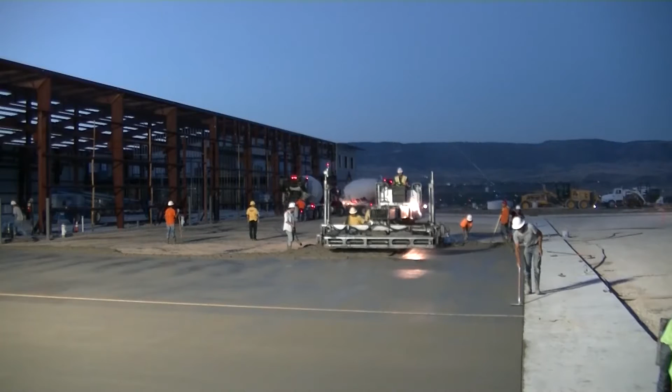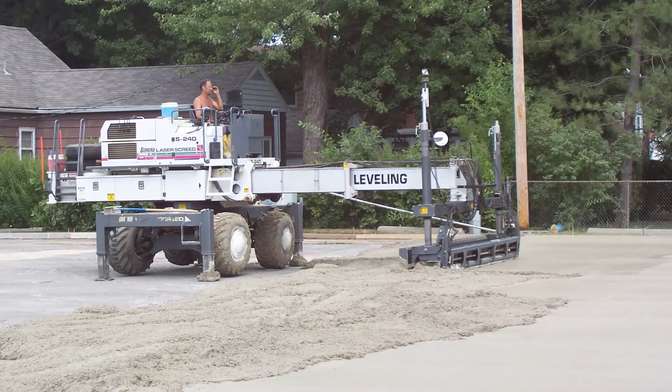Through the course of this video, we're going to walk you through the process of doing concrete overlays on top of asphalt parking lots. Now, this may be a concept that's foreign to some of you, thinking that you can pave directly on top of other pavements. But think about creating a composite pavement or resurfacing the existing asphalt with a longer lasting, durable concrete layer on top. Or if you want to add additional concrete to up the load carrying capacity of the existing asphalt parking lot to change its use.

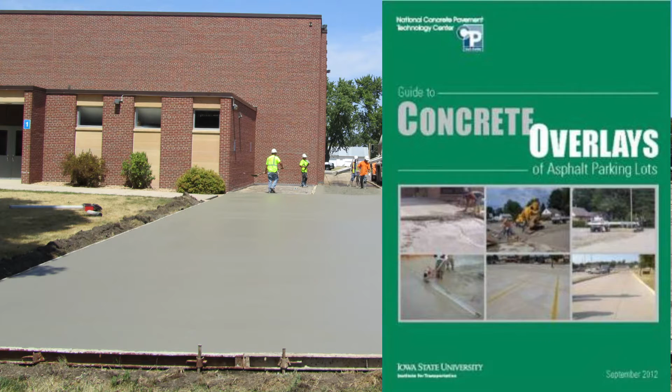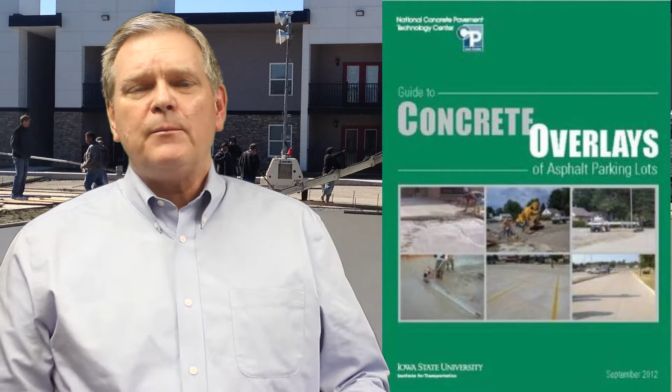We're going to be referencing today a guide that was prepared specifically for doing overlays of existing asphalt parking lots. And before 2012, a document like this did not exist. We've been doing concrete overlays of parking lots for over 40 years. So this is not a new technology, but the ability to take the technology and make it available to the masses across the United States has just come into being by compiling all the information into a concrete overlay guide.

That concrete overlay guide was prepared by the National Concrete Pavement Technology Center, who is the expert in doing all types of concrete paving across the nation. And it's a guide that's been put together to be geographically insensitive. What do I mean by that? It can be used anywhere in the United States with any type of existing asphalt pavement in place, taking into consideration what the mean average daily temperature is for those areas, and that determines what the concrete thickness will be for any given application.

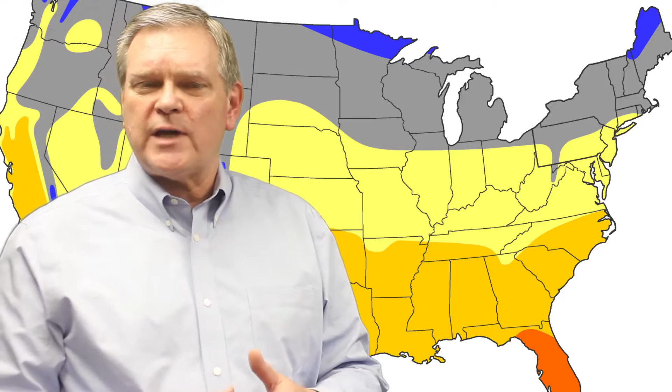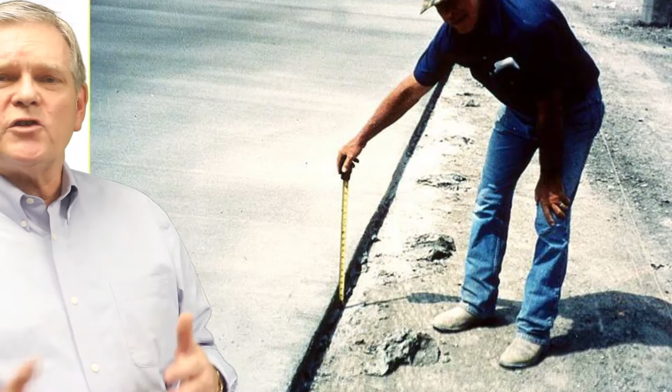This is a widely accepted practice, not only endorsed by the Ready Mix Association, but also by the Concrete Paving Association for doing composite pavements. And when we talk about composite pavements, we think about the terminology of doing layers and layers, building strength into a new pavement. And that's why a thin layer of concrete, something as thin as 2 inches, on an existing asphalt pavement works very well for long-term durability.

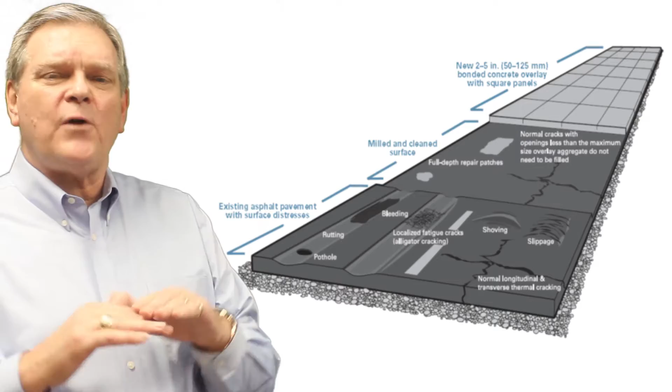Think about taking a piece of plywood, and this plywood gets its strength from different layers being bonded together. And that's really the concept we have when we place concrete on top of asphalt and we bond it to the old asphalt pavement.

The guide was put together in conjunction with the National Ready Mix Concrete Research and Education Foundation, who brought it to the industry at no charge. What do you mean by no charge? Well, it's free for a download that anybody can grab as a free PDF. You can buy printed copies for a very small fee, but it was not the intent of putting this document together to sell it at a profit.

We wanted, more importantly, to get the information out to the design community on how to properly design, evaluate, and determine the thickness for the overlay. It was also designed for the contractor, who can use the document to look at the best practices and the proven practices that have been developed over 40 years of research and proven applications to make these applications successful.

In the course of 40 years, you learn a lot of things that will work, but you also learn a lot of things that don't work. And so the intent of this is to make sure every contractor has a proven guide to work from when constructing these overlays. Let's delve into why we wrote the overlay guide and why it's become the document for doing these types of projects.

Prior to 2012, when the guide was published, we didn't have any definitive document that would teach a contractor or a designer how to design and build an overlay project. We had a lot of other documents that referenced overlays on parking lots that really weren't, though, the guide for how to construct them.

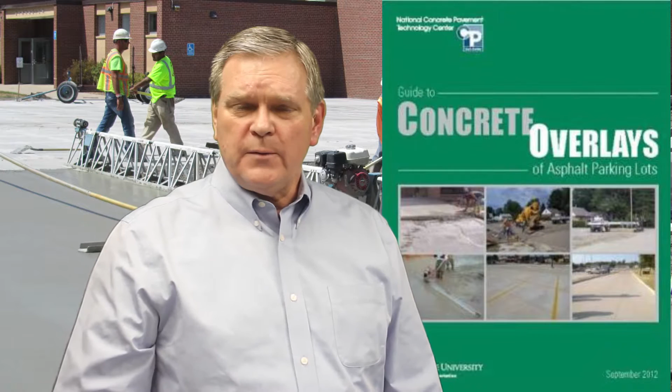So we put together a team of experts, much like the concept of an ACI document, and we brought together industry experts from the engineering community and from the construction community, and we put together the document with a committee of those people contributing the best practices and proven practices that have been done for over 40 years.

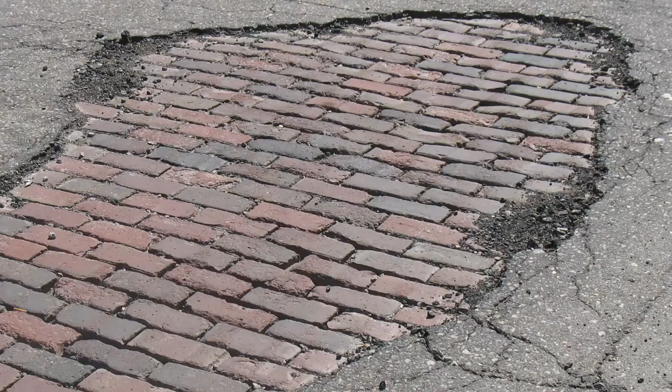Some of the tough things that were hard to do in the beginning was to determine what type of shape the existing asphalt pavement was in. We know that the asphalt pavement has a really good base under it, because one of the things an asphalt contractor does is prepare a very good base for paving the top course on. If we take a look at the existing asphalt pavement, we're able to determine what type of shape that existing asphalt surface layer is in, and also if there's any problems down below in the base layer, it'll show up in the way of potholes and sinkholes and maybe places where the pavement has either heaved or shoved.

By evaluating the existing asphalt pavement, we can then determine what the best approach is. The guide shows us how to do an observation of the existing pavement. It walks us through investigative procedures on determining what the thickness of the old asphalt pavement would be, and then with charts that are developed through the BCOA, which is the Bonded Concrete Overlay of Asphalt Pavements put out by the American Concrete Paving Association, we are able to look geographically at that mean average daily temperature and determine what the thickness will be of the new concrete overlay.

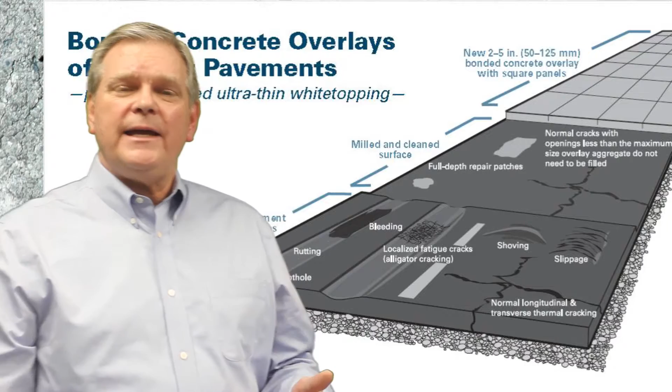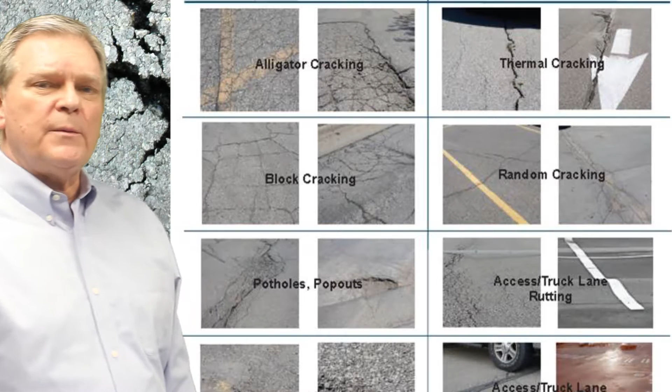And that is the beginning of our process of the investigation of the existing project. Once we determine what the condition is of the existing asphalt, we're able to determine what the best approach will be for doing a concrete overlay on top of the existing asphalt. By using the guides in the book, we give visual pictures on evaluating the condition of the asphalt and determining which type of distress we may have in the pavement, and we're able then to move forward by determining the thickness of the concrete that will be on top of it.

We've then broken the parking lot down into three distinct areas: the heavy-duty loads, the light-duty loads, and the industrial loads. And you can see that we have now determined that maybe those thicknesses need to be different in those different areas of the parking lot based on the existing condition that the asphalt contractor left with base material when he constructed it initially. Then we determine what the joint spacing will be, and we lay out the joint spacing based on a conservative joint spacing arrangement, and we're ready to pave.

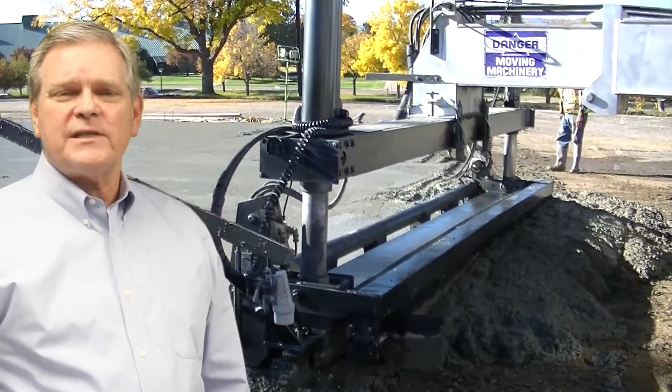From a construction standpoint, what has really moved this technology forward is the advent of the 3D guided laser screed that's come into play over the last 15 to 20 years. Prior to this, overlays of parking lots were done with string lines, hub stakes, pipe screeds and truss screeds, and it was a very long process. What has really changed the process is the 3D laser screed and the total station applications that allow it to read the existing contours of a parking lot and correct any low spots or bird baths that may occur in the existing pavement with the placement of the 3D laser screed.

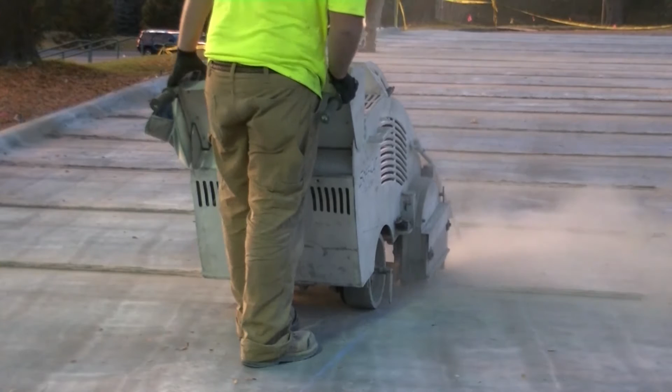It has not only changed that aspect of it, but the production side has moved from just a couple thousand square feet per day to tens of thousands of square feet per day with the 3D laser screed. The advent of the soft cut saw has also helped, because now we can get on the pavements quicker and saw cut them faster, and more importantly at the right time and the right depth of cut with the soft cut saw.

You're going to hear us talk a lot about saw cutting, timeliness of saw cutting and the size of panels, and that's very important when we look at overlays. Leonard will talk more about the importance of saw cutting and its timeliness, but we can't stress enough how important it is to get the joint layout done in a conservative manner and the saw cutting done at the right time.

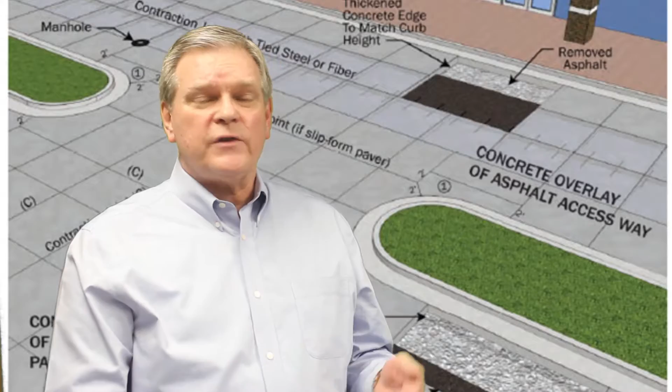You're also going to hear us talk about the surface being clean and dry. It's one of the important things we have to look at, because when we build a composite pavement, we're looking at bonding the concrete into that existing asphalt. And how do we do that? We bond it with the exposed aggregate that is laying on the surface of the existing asphalt.

So one of the rules of thumb is we want to look at a pavement that doesn't have a fresh seal coat. The fresh seal coat will act as a bond breaker, so we want something that has exposed aggregate and a seal coat that's probably 4 or 5 years old, so we get that bond to form the composite pavement. Once the initial process is done, NRMCA is ready to supply you with a design assistance program. You'll hear more about that in the next segment.

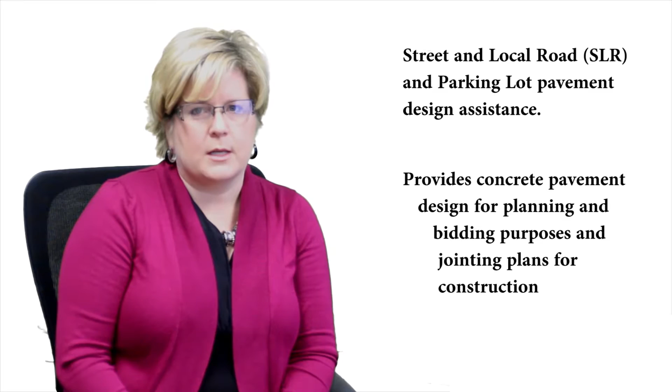My name is Amanda Hult, and I am the Director of Pavement Structures for the National Ready Mix Concrete Association. As an engineer with NRMCA, I oversee the Design Assistance Program, which provides pavement recommendations for new and existing pavements. NRMCA can provide pavement recommendations for streets and local roads, as well as parking lots. These recommendations can be used in the bidding process as well as for planning purposes. Joint plans can also be used to help with construction of the parking lots.

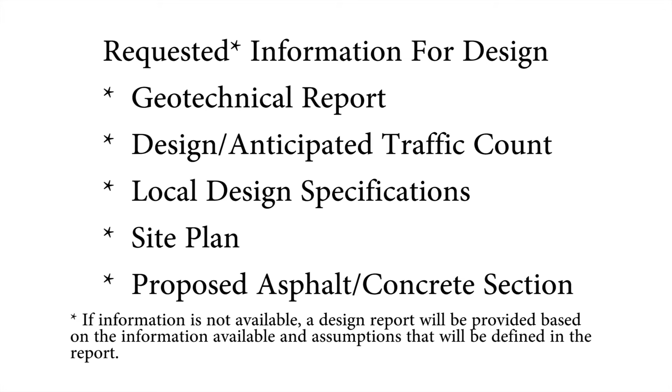NRMCA requests the Geotech report for pavement recommendations. If this report is not available, a pavement section can still be supplied. The pavement reports can be supplied for new or existing pavements. We can also provide reports for conventional concrete, roller compacted concrete, pervious concrete, and concrete overlays. The pavement reports can be any of those or a combination of several of the different types of pavements.

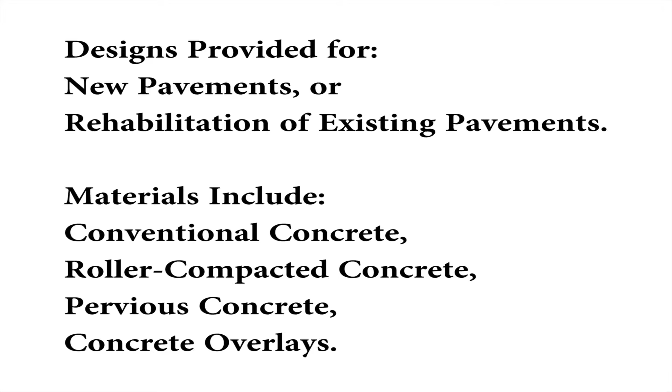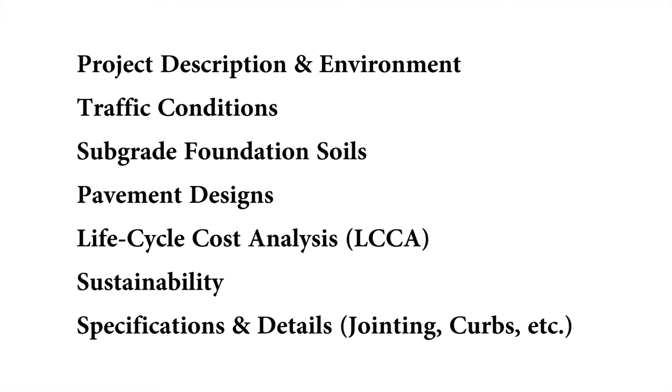Within the pavement report, you will find a project description as well as any environmental information that is known about the project. Traffic information and subgrade soils information will also be provided. New and existing pavement sections will be determined and placed in the report. A life cycle cost analysis can also be provided for the pavement section. Sustainability and specifications can also be included in the report.

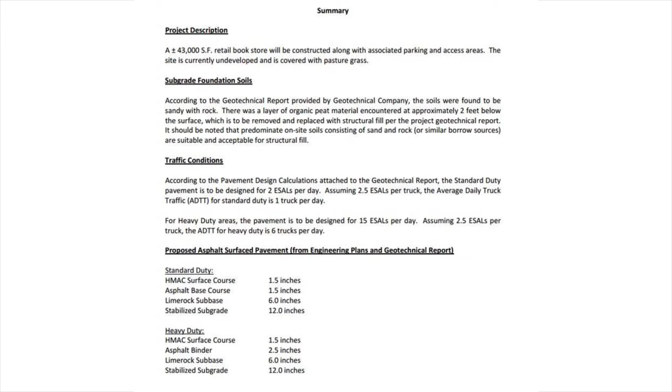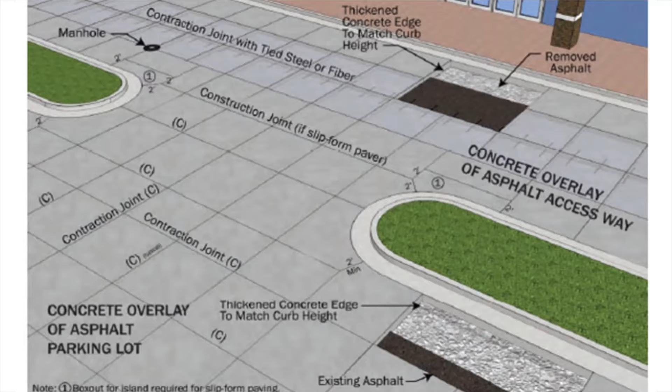Here's an example of a recommended jointing plan. We'll label the joint plan with the recommended joint spacing, as well as the different types of joints that are located on your site. We'll also include a list of general notes that can be used for your jointing plan. All of these notes are taken from ACI 330. These jointing plans can be a collaboration between NRMCA, the engineer of record, as well as the contractor.

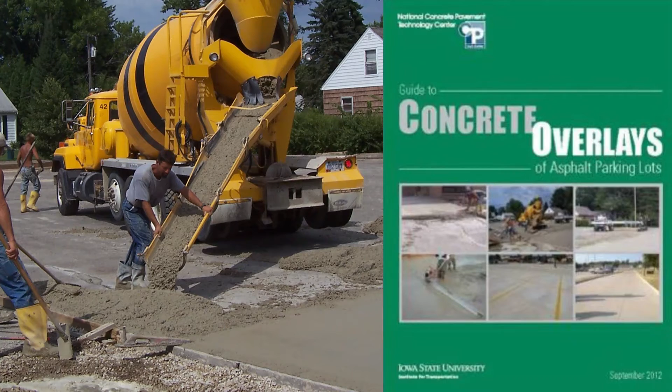In producing recommendations for overlays, the Guide to Concrete Overlays of Asphalt Parking Lots was used. NRMCA incorporated this guide into the pavement recommendations for the Pinehurst Country Club in Denver, Colorado. NRMCA collaborated with the contractor on Pinehurst Country Club for joint plans as well as pavement recommendations.

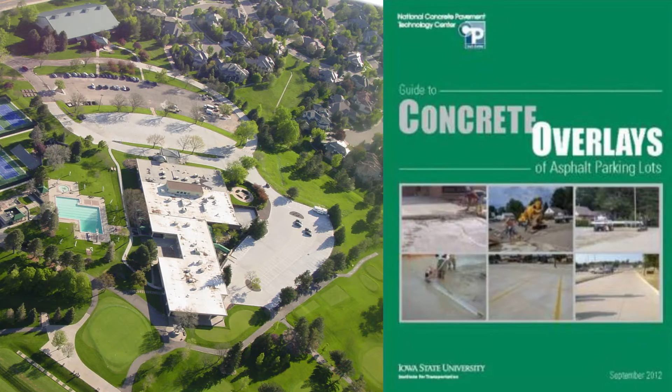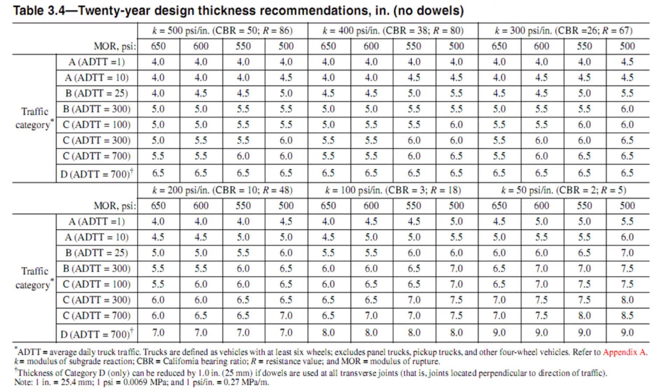When providing pavement recommendations, NRMCA incorporates the ACI 330 design chart. This design chart takes into consideration the subgrade soils that are on the site, as well as the traffic that will be utilizing the concrete parking lot.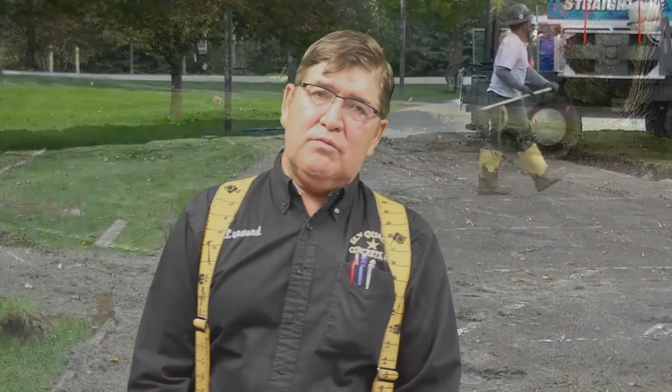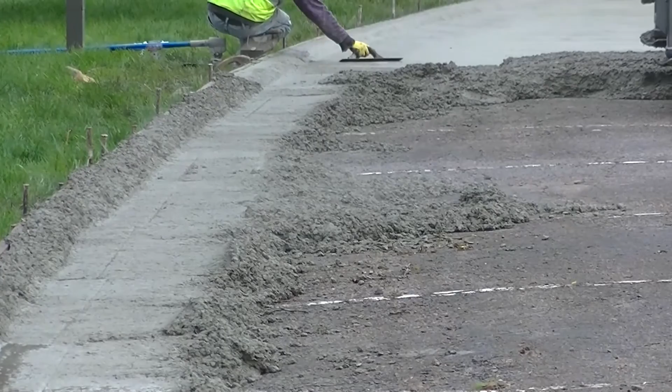One of the challenges of Pinehurst was to address the drainage. I accomplished this by overlaying the curb. I actually took out the back of the curb and raised up the top of the curb 3 inches. That allowed me to get the lot to drain right. The reason it wasn't draining right was originally the curb and gutter and everything was put in right, but they didn't have wide enough valley pans in the area where they needed wider valley pans.

And there was one overlay that was done at some point in its life where they put 1.5 inches of asphalt over 3 inches of asphalt, but they transitioned into the curb and gutter, which was actually causing a blockage of the water instead of letting it drain like it should have. That's why I raised the curb.

Another challenge that needs to be worked out for a successful project: it's very important to work with the facilities management to be able to stage your work to where it has the least effect on what's going on within the facility. As a contractor, this is what I feel is very important. A lot of different steps have to be brought together.

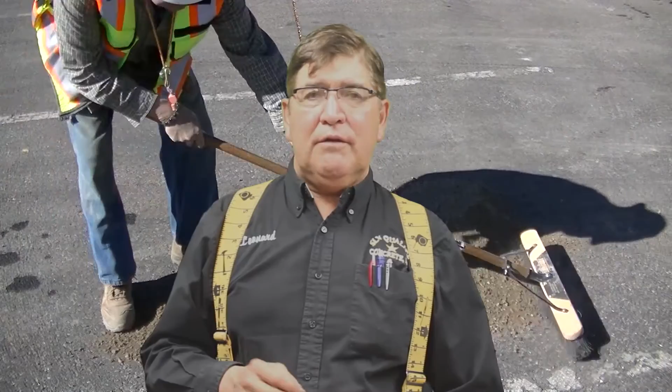We have great design assistance from the NRMCA with their design program, but you've got to couple that with a lot of coordination, good pre-planning, good material. There's just a lot of things that need to come together to give the owner what they're paying for. A long-term pavement.

A real important step getting ready for pavement is to address the cracks past a certain width. The design manual talks about that: when does a crack need to be addressed, how wide, and what you should do. One way to do that is to fill the crack with crusher fines so that it doesn't give an irregularity to the bottom of the concrete. There's other ways to do it with flowable fill. On some of the cut across on Pinehurst, we actually put concrete back.

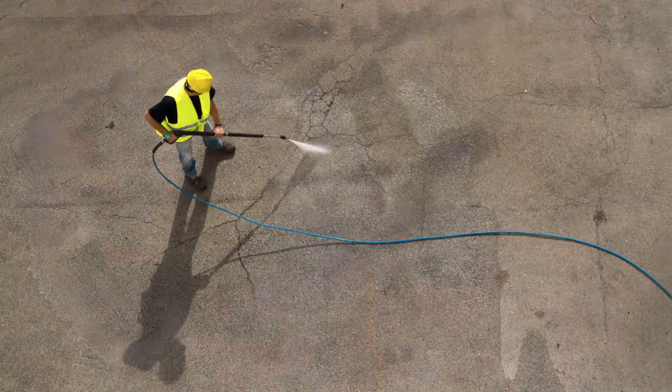What's really important is that the concrete that you're overlaying the asphalt with doesn't see a lot of variance in the subbase. You want to keep that as uniform as possible. Prior to actual placement of the concrete, you want to clean, as it was stated earlier, so that there is a good bond of the concrete to the asphalt.

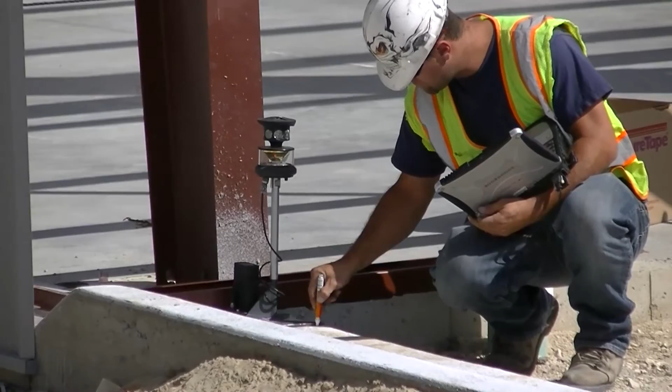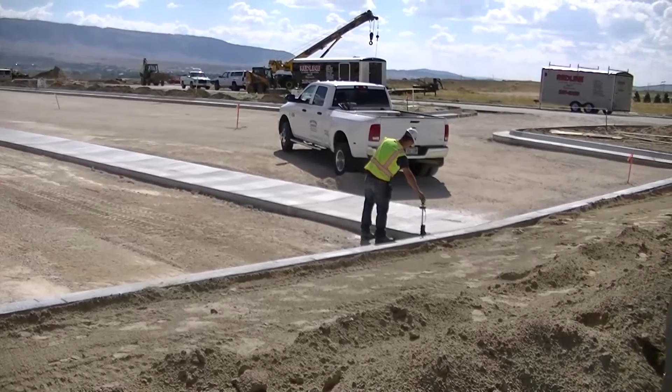Prior to the placement, getting ready for the laser screed's next day pour, the top grade needs to be established for drainage. That's accomplished several different ways, but they like pins around every 20 feet. After that is set by me, the contractor, the operator of the laser screed will come in and shoot the top of the pins. That gives grade into the computer program that the next day will let the laser screed know where it's at and tells the screed where to put the grade.

Very important step. In preparation for paving, it's very important to address the top of the asphalt and areas of distress, which could be areas that need to be removed if there's a lot of distress, recompacted, or put back with flowable fill. Large cuts in the asphalt or cracks can be addressed by putting in a sand material or a flowable fill.

Also at Pinehurst, the facility needed to have some underground piping put in prior to the actual placement of the concrete. So all of that work needs to be done way ahead of paving, so when you're actually paving, you don't have to be holding back for anything.

In the design of the construction of the pavement, another step is to design how you're going to tie into existing structures or pavements that are already there. One way to transition into existing curb and gutter pavement is milling. You mill down the thickness of what's needed for the concrete pavement, and then you transition that up in 8 feet, 10 feet, so it's not noticed.

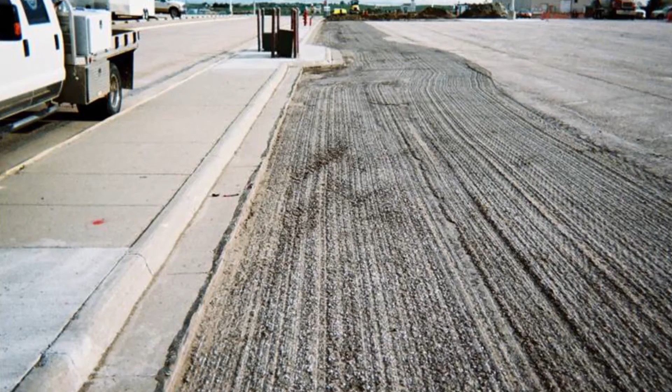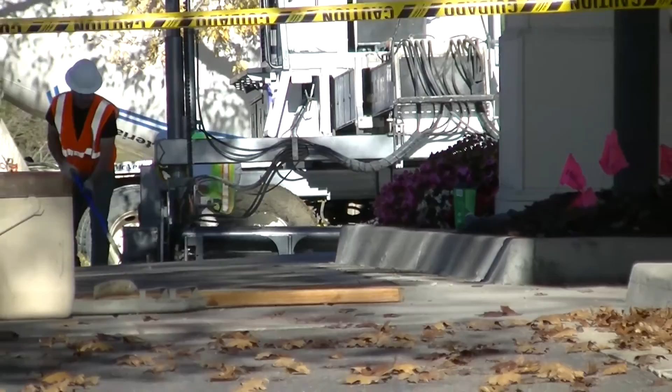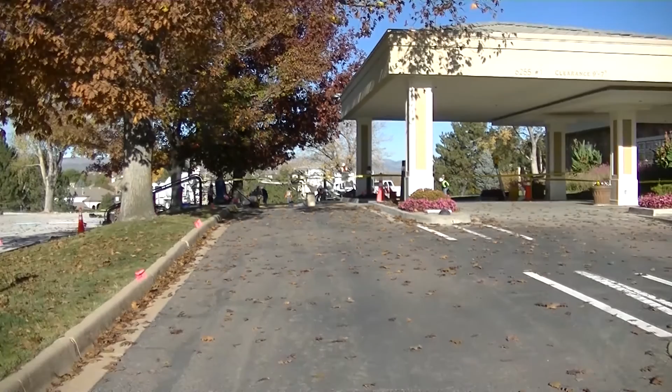The other issue that you need to deal with is existing manholes, light poles. There could be a lot of things in a parking lot that need to be addressed. At Pinehurst, I raised the manhole cover to compensate for the new pavement. Each job and conditions will be different, but this is where the challenge comes in. It gives you a lot of areas where you can figure out the best way to accomplish what you want.

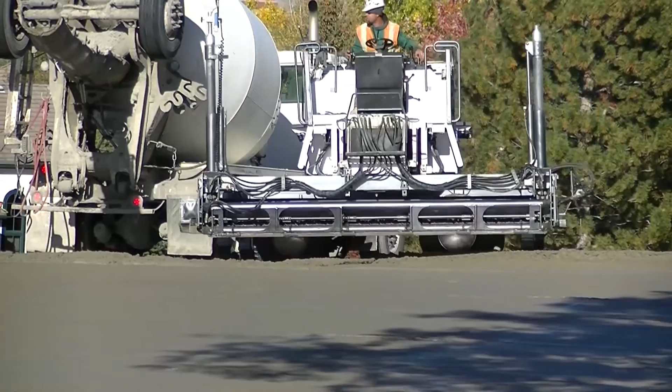There's key elements to a successful project. Laser screed, as John touched on, is one of the best ways that I found to do this kind of work, because the laser with the 3D Profiler controls grade from top down. In other words, once grade is set, we'll have pictures showing the laser screed operator setting existing grades that are put by me for the drainage plan. It controls the grade during placement to make sure that the drainage is proper.

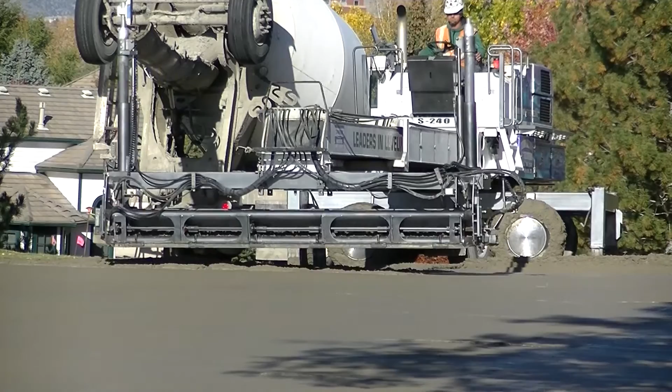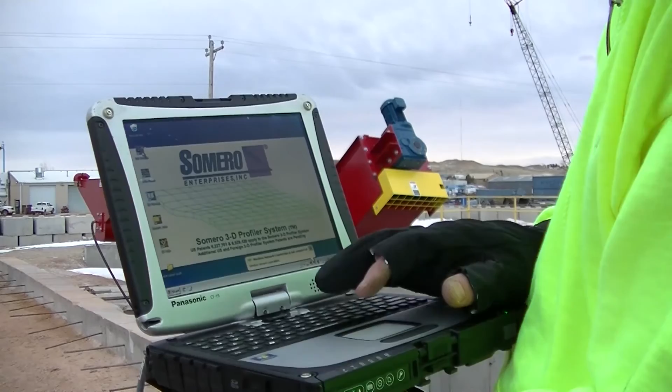It's been around, I think, since around the year 2000 when it started to be perfected, but it was when they went to the 3D Profiler System and the computer programs that allow it to do contour paving that this type of work really took off. It is the tool of choice for this type of work. The second big part of it is the ready mix producer. You need to work with them because timely deliveries of the concrete are crucial to a successful project.

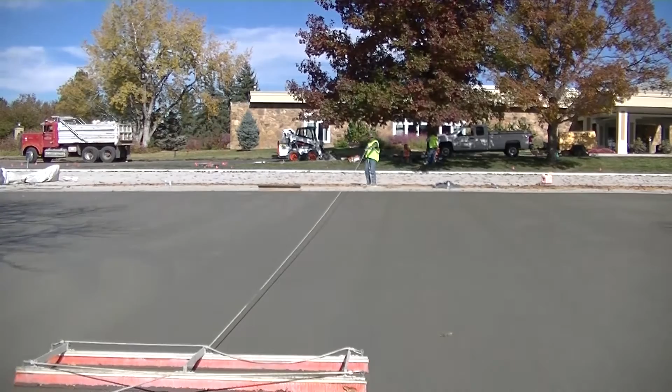After the actual placing of the concrete, the texturing is the next step. That's ahead of the saw cutting. Very important that that is planned and that procedure is done properly. A real good way to texture the concrete is with a broom. In our slide that we're showing you here, we have a rope pull across broom that will texture to different degrees. That's very important. There's different degrees of texturing on the broom by just replacing the broom hardness of the bristle.

The pull across roll broom works really good because most of these placements with the laser screed are wider where you can't reach them from the side, and that's why the rope broom is the choice for my paving, because of the width of the paving. Another key element for success is the saw cutting. It's for concrete overlay because of the thinness of the concrete, and going with a thinner concrete pavement, bringing the joint spacing down is why it works.

That has to be pre-planned out because at the point that you're cutting, you need to be able to cut as soon as possible once the concrete will allow that. And that's a lot of cutting. So that's a very key point that needs to be covered in your initial design for construction. A lot of things that need to happen with a successful project are just inherent to concrete. So as a contractor, you need to use good concrete practices.

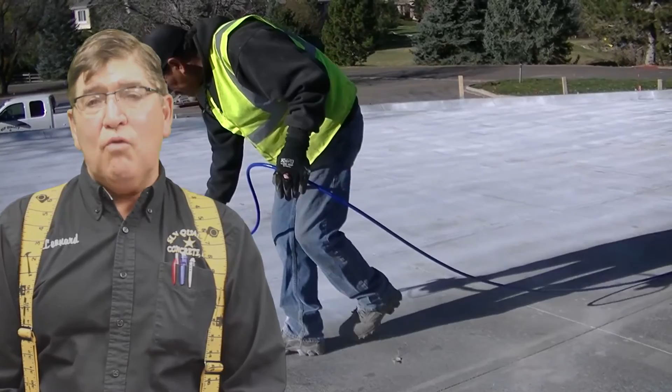And the one thing that needs a lot of attention besides just the placement and the saw cutting is the curing process. And I think in the past a lot of attention, proper attention hasn't been put to that. So a very important part is to make sure that you cure the concrete with approved curing compounds at the rate that they need to be applied. And they need to go on as soon as possible. And that's a successful concrete pavement project.

Well, now that you've watched this video, you may still have questions as to why someone would even consider using concrete as an overlay material in place of asphalt that they've used for years. This is a proven technology that gives owners a choice. In the past, they've only had a choice of one paving material. There are some benefits of using concrete as an overlay material rather than doing the same things that they've done in the past. Let's just recap quickly some of the benefits of doing concrete overlays on existing asphalt parking lots.

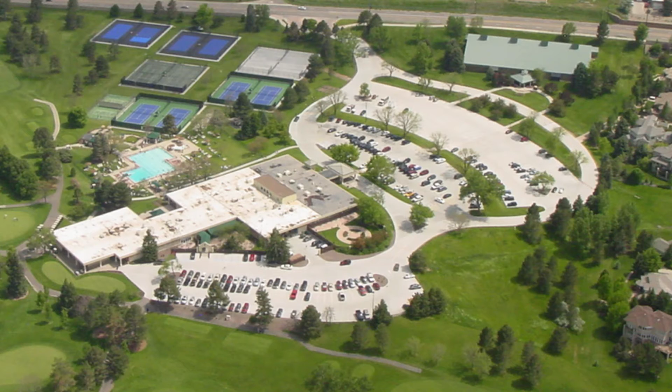It renews the surface with a longer lasting material, and it gives owners a choice. And time and again, when we work with owners, we find that they want a choice, that they understand that there's only two choices for paving, but they would like to have that choice. And once they take a look at the concrete overlay, they make the decision to go with a longer lasting material. From a construction standpoint, it permanently corrects and fixes low spots with a contoured paving program. And whether those low spots come from natural settling or maybe just simply from the tire impressions that occur in pavements, it fixes those permanently.

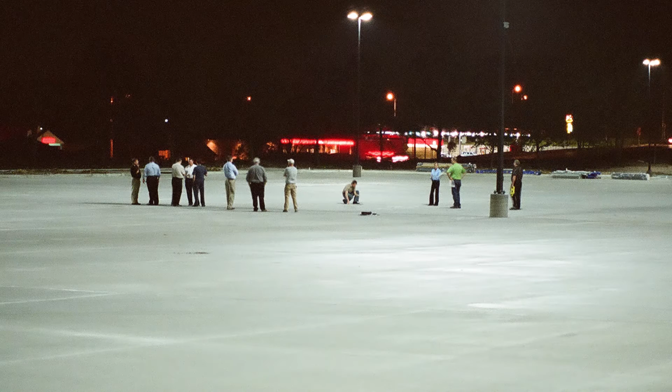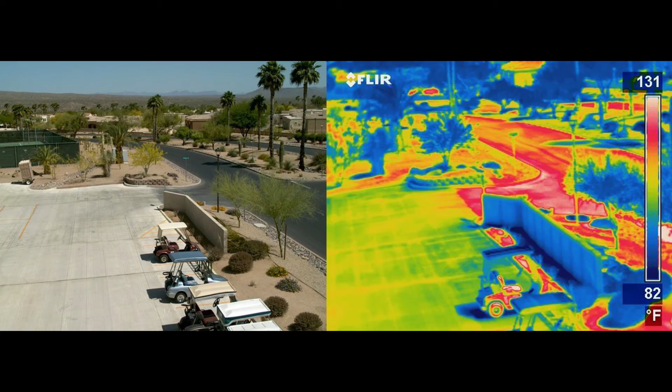They never come back. It optimizes the new lighting that we see being used across the United States, and that's the advent of the LED light. Many customers have told us they need a lighter colored paving material when using LED lights to get the best optimization. Lighter colored paving reduces heat island effect, and that's top of mind in most cities across the United States. But it greatly reduces the interruption to your business. Once you pave with a permanent paving material, you don't have to shut down portions of your parking lot in years to come for maintenance and things that do disrupt your business.

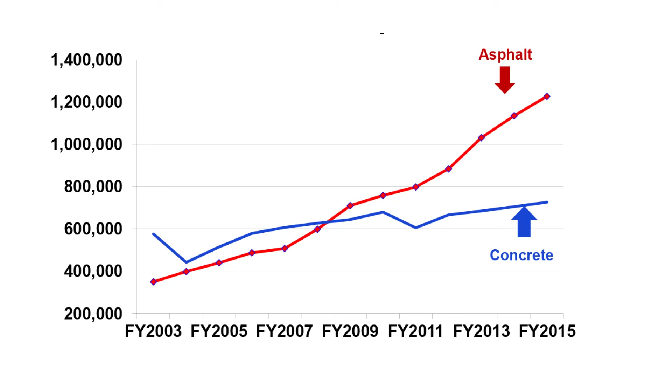There's long-term cost savings. With the cost of paving material in the marketplace, concrete has never enjoyed the competitiveness it does today in the history of paving. Let's pave.